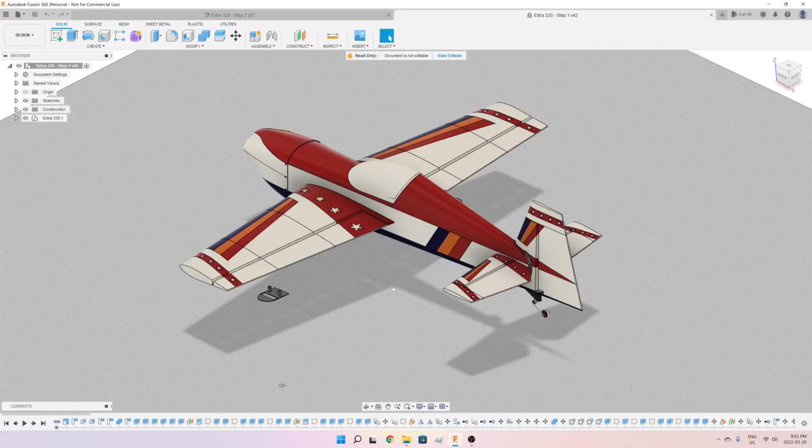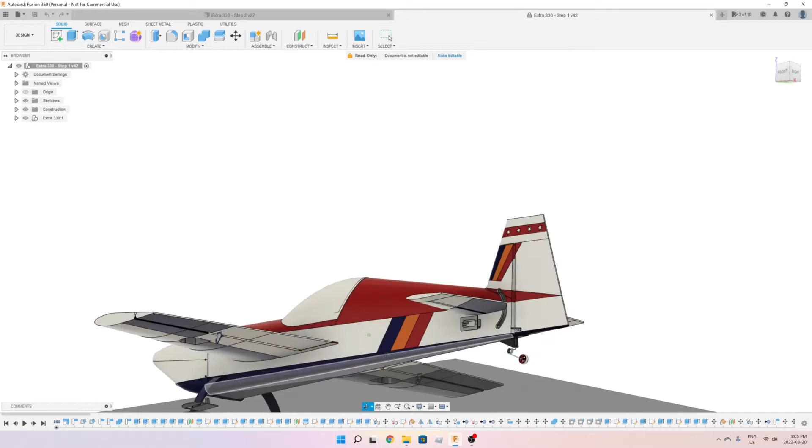If you remember last time, I completed everything related to the wings, the elevator, and the rudder, and I created pockets for the servos. As you can see, those are the elevator and rudder servo pockets that would go inside the fuselage, not protruding like that. I've also created servo pockets for the left and right wings, along with the mounts for the servos that would go into those holes. That was all done some time ago.

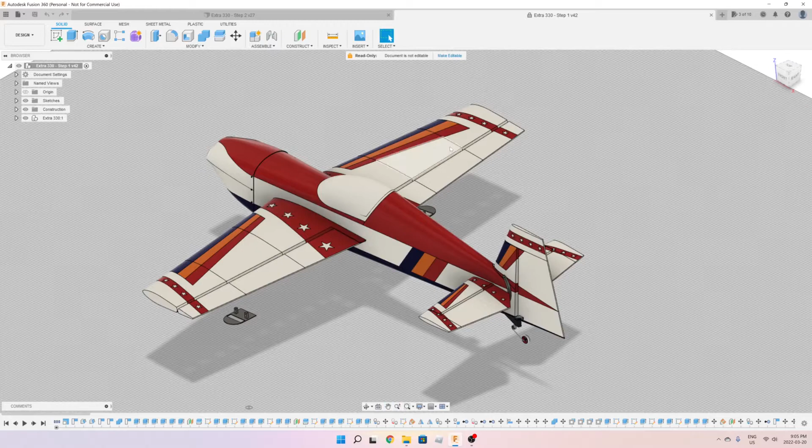So let me show you what I've done so far with the fuselage. I'm going to close this file and keep the other one open. I've hidden the other parts so we can focus only on the fuselage, and let me first hide this battery tray.

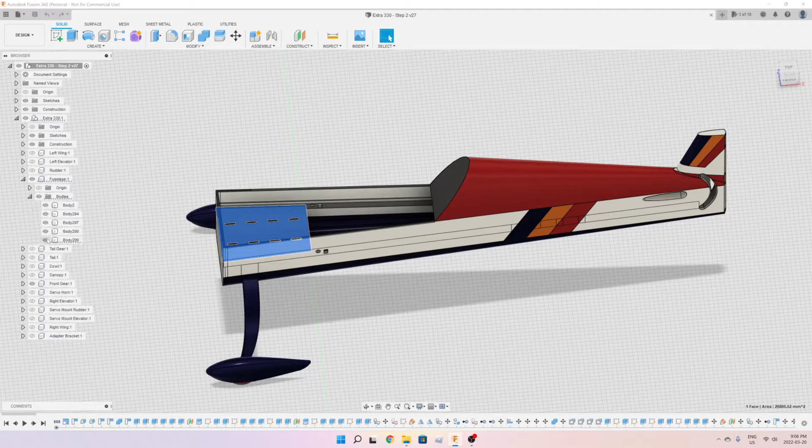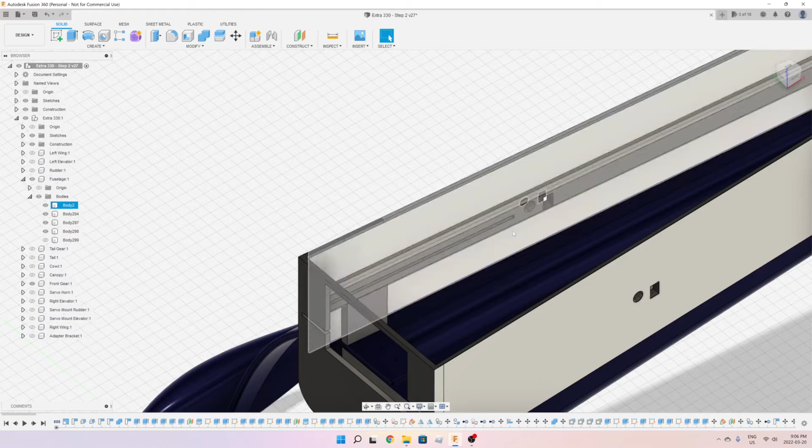I've created 3 main ribs inside to reinforce the fuselage. The fuselage is primarily going to be printed using one wall, 0.4 millimeters, but I've added 3 ribs inside to reinforce it. There's a rib on the right hand side and an identical rib on the left hand side, and then a 3rd rib running across the bottom. Those 3 ribs meet at this plate in the front.

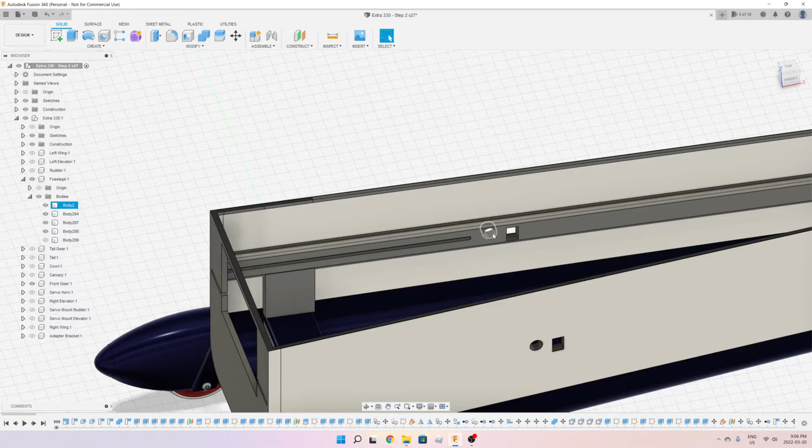As you can see, I've created a hole for the wing spar, and also 2 holes for the wing servo wires to go through. I've also created a slot here in the front side of the ribs, and those slots are basically for the battery and electronics tray.

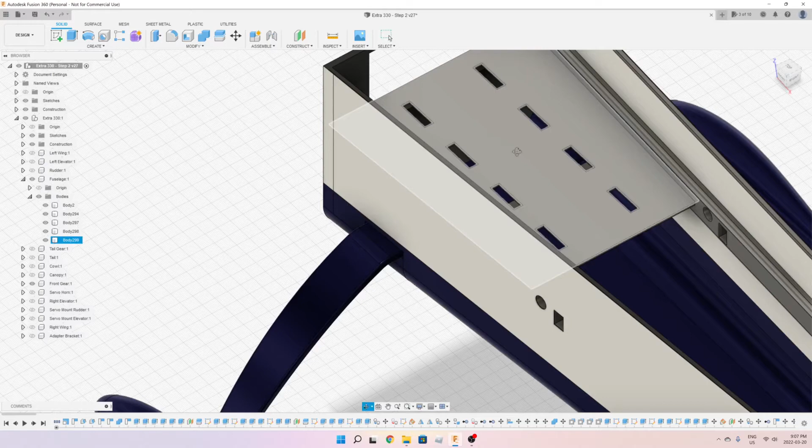So as you can see, this is the battery and electronics tray. You can put your receiver here, you can put the battery, and the straps for the battery would go through those holes. Let me show you, I'm going to slide this out like this, so you can see how it slides in and out into the fuselage.

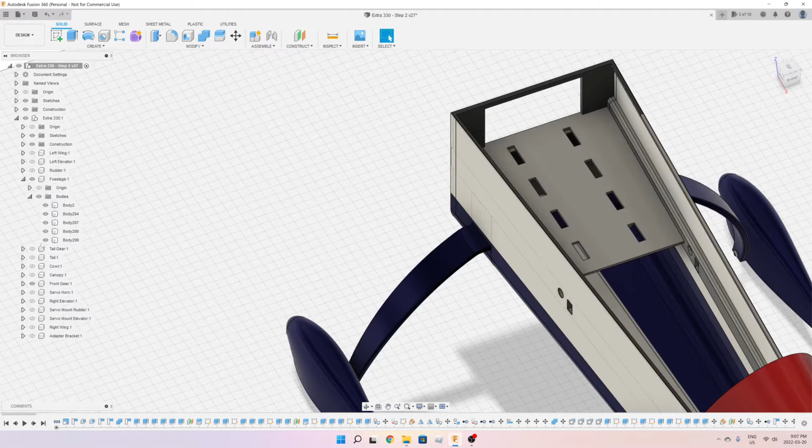Let me hide this battery tray altogether. Now let's talk about the wheels and the support for the landing gear. Let me first hide the fuselage altogether.

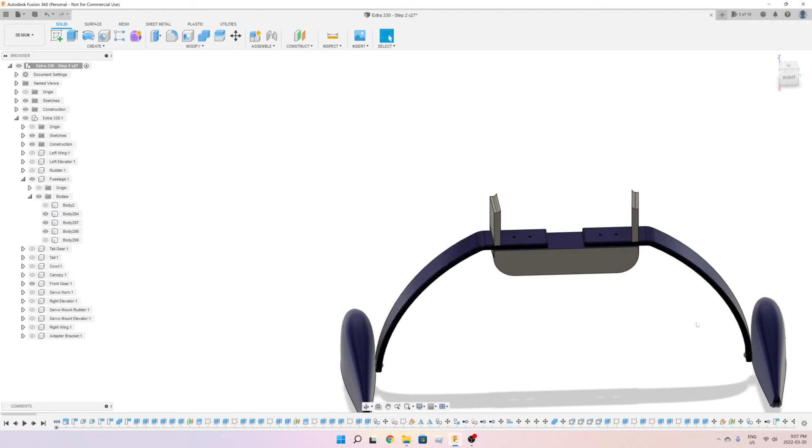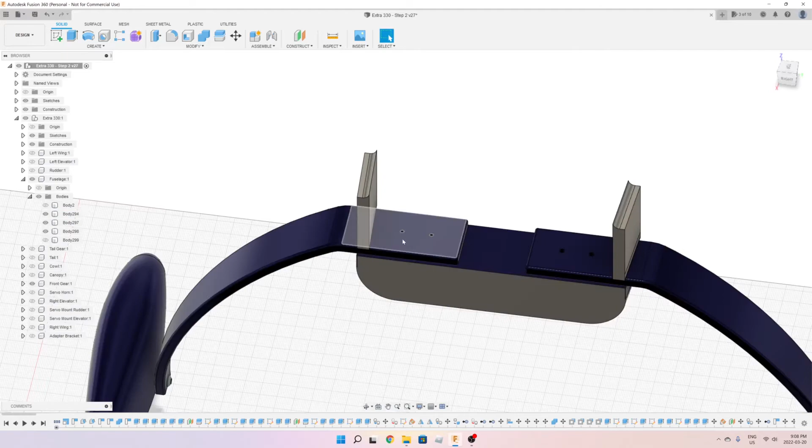So as you can see, you have the landing gear here, the left and right landing gears, which is basically the wheel, and also this part, the support or leg that extends down from the wheel up to here. You have 2 pieces, and those 2 pieces will bolt to this support here, each with 2 bolts, one here and one here, and you can insert the washer and the nut from below and tighten it up.

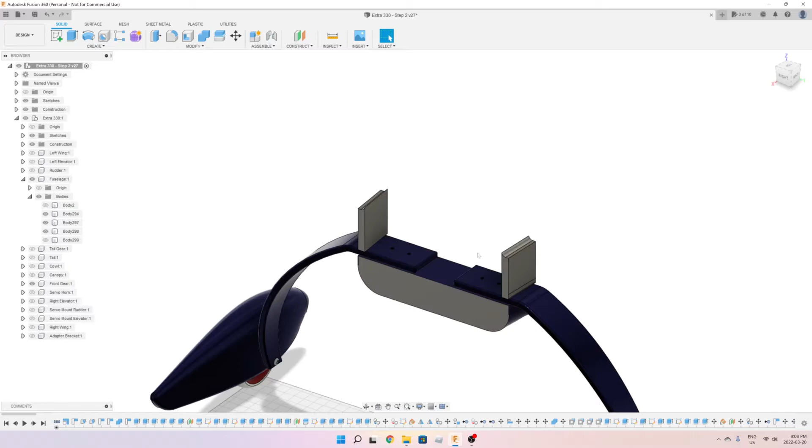So this would fix the front landing gear to this piece here, and then this would slot inside the fuselage. Now why do I have those 2 pieces here? Let me explain. I'm going to unhide the fuselage, and you will see that those 2 pieces will support the whole structure against the left rib and the right rib.

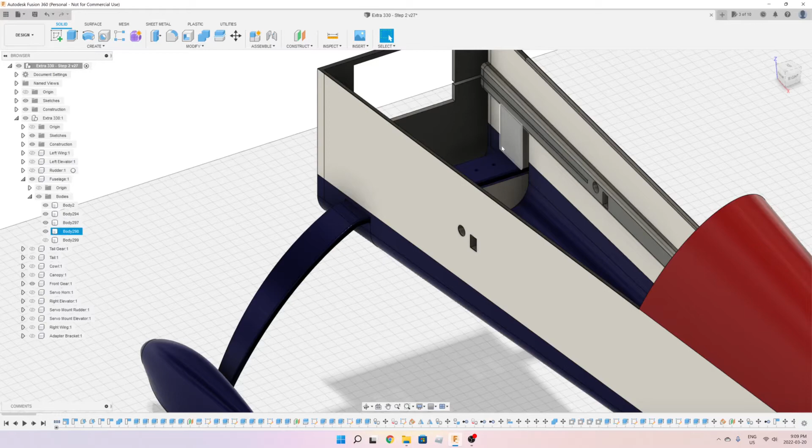So when I bolt the front landing gear to this piece, and then insert it into the fuselage, it's going to rest on those 2 pieces on the sides, and those 2 pieces would rest on the left and right ribs. Some glue is needed here to glue those supports to the ribs, left and right, and this structure will also be supported by the bottom rib here.

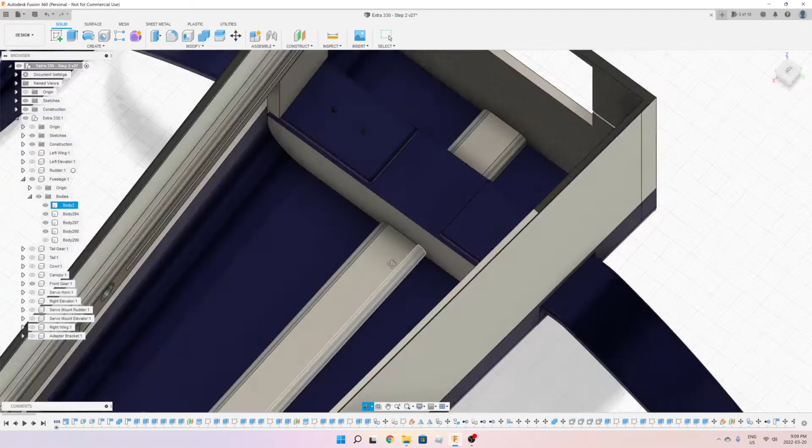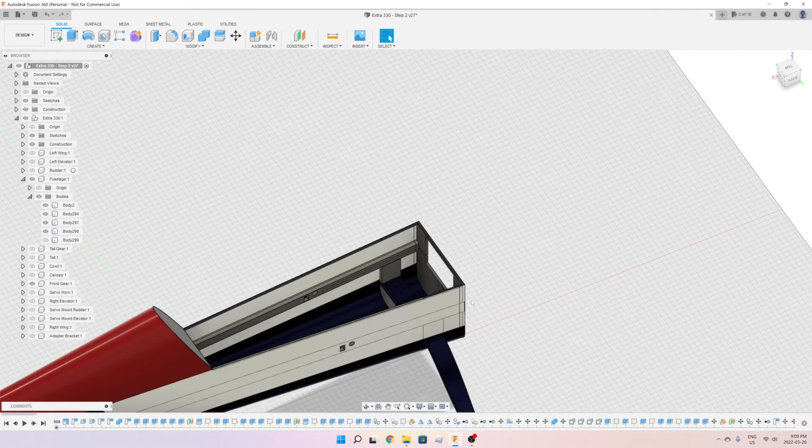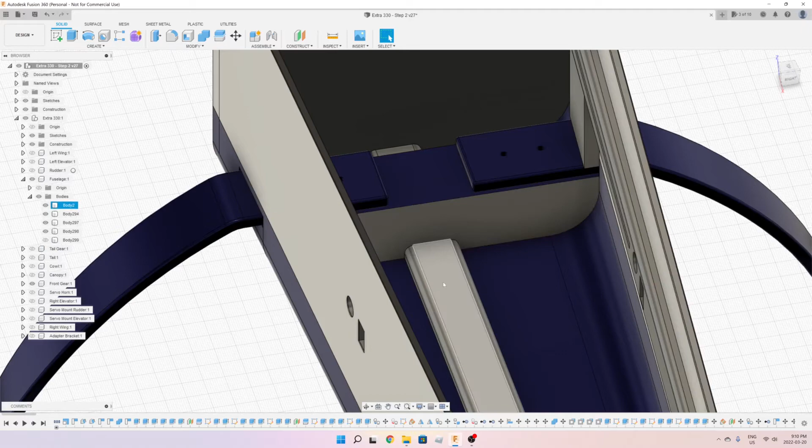So it's supported from the front and the back, and some glue is needed to fix this structure to the rib from the back and from the front. This way the landing gear is supported when the plane lands and there's an upward force. This upward force is supported by those 2 pieces, and any torque on the wheel, on the landing gear, is supported or prevented by the bottom rib, so the whole structure won't twist because of the support provided by the bottom rib.

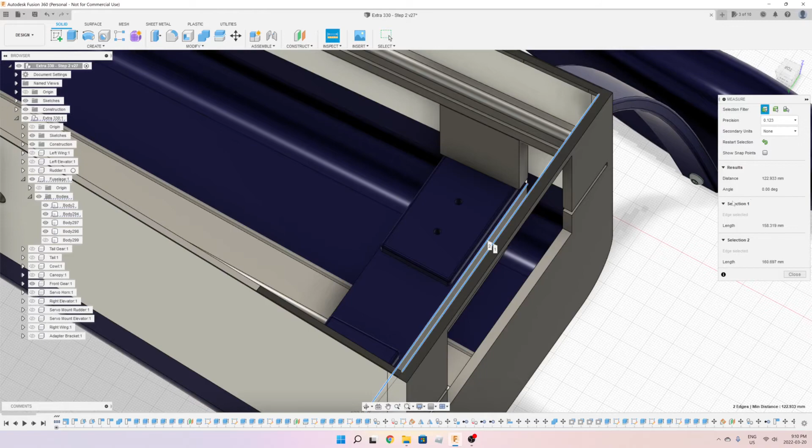And the plate in the front, I made it maybe 3 millimeters. Let me check. Sorry, let me check again, inspect from here to here. 4.5 millimeters. So the front plate where the ribs meet is around 4.5 millimeters thick.

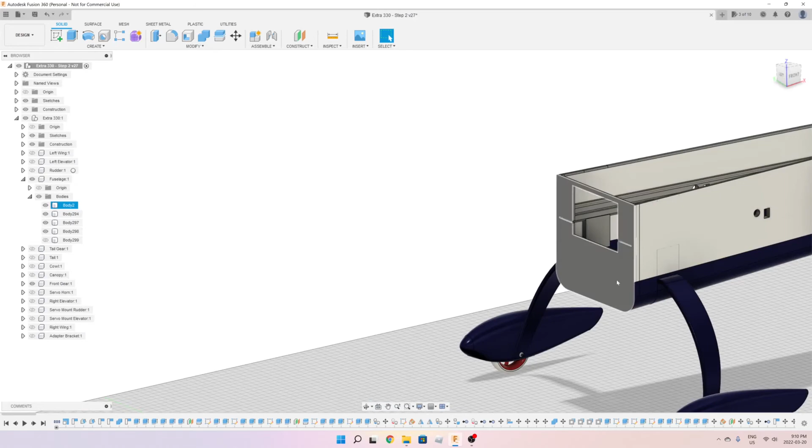And as you can see, the battery tray would slot in from here. Now the work that I have left to do is basically to create the motor mount, which I should place over here.

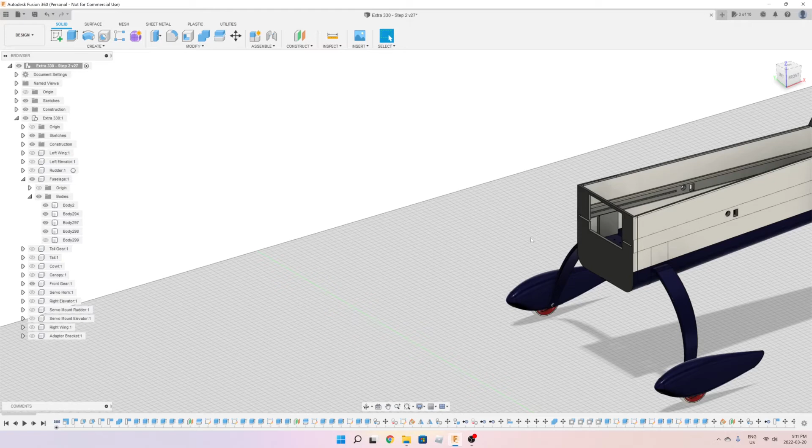I have not designed the motor mount yet because my plan is to place an E-flite Power 60 motor in the front, and I need the dimensions of the X mount. As you know, the motors come with an X mount. Let me actually show you.

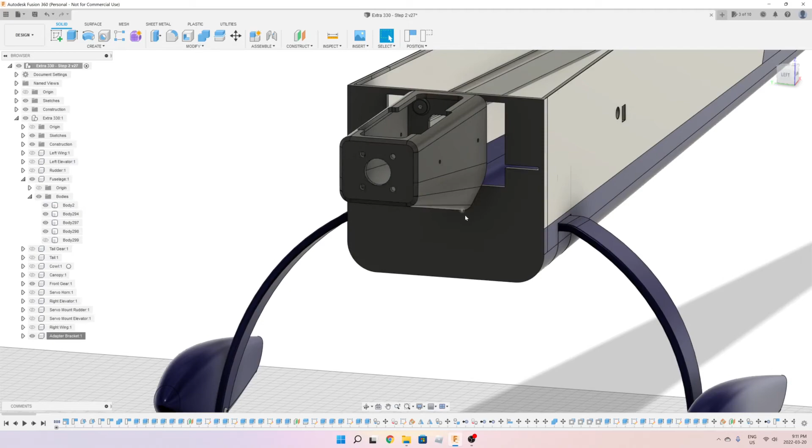This is the kind of bracket that I'm going to place here in the front. I'm going to move it like this. This is not the final bracket, I'm going to change that so I can bolt it to this front plate. But just to give you an idea, the motor would mount here, and I have no idea what the dimensions are for the X mount.

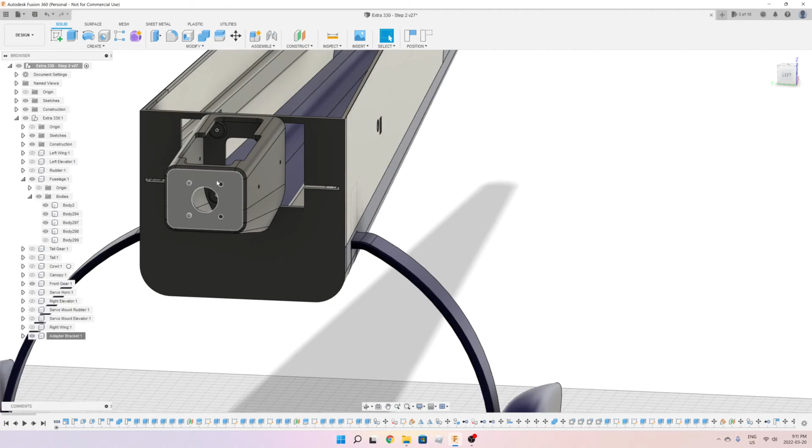So I need to buy the Power 60 motor, and then I'll have the X mount and its dimensions, so I can accurately design the motor mount with the hole spacing for the X mount on which the motor would be mounted. Let me hide this again. So that is the last thing I have to do pertaining to the fuselage.

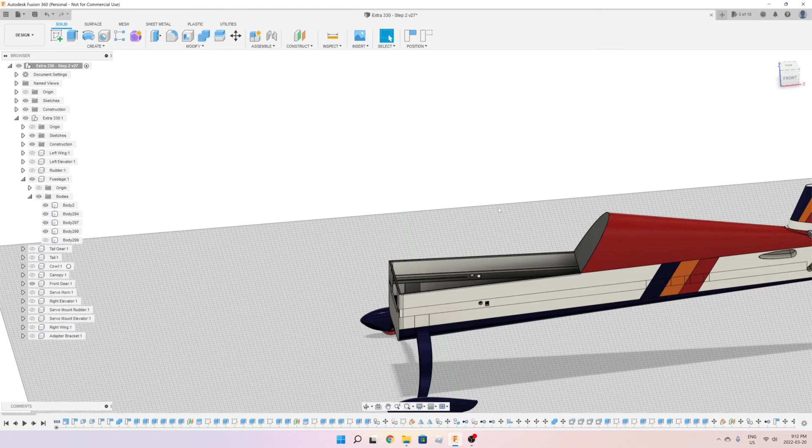After that, there's some minor work with the landing gear. As you can see, it's curved here, and I want to make it straight to make it easy to print. That is pending, and maybe I have some minor work on the cockpit here too. I want to create a latch mechanism to make sure the cockpit sticks when you put it in, and that would be it.

Then I would basically start printing this airplane. This was the update for today.